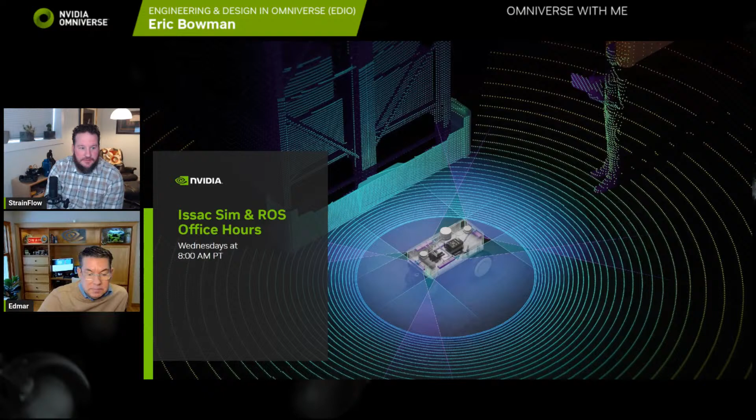I think I might start to help out in those office hours. I don't know if we heard back. Yeah, let me, actually that's a good point, it's a good reminder, let me ping them and see. It'd be great, I think your presence would be fantastic. It depends, we're not sure.

Very cool, so we got Papa Chuck in the chat. So are we hitting the steering today? Is that what's next up, or not yet? I've got a deadline now so you're going to see me get serious, getting it done during the week, just not during the live stream.

So I think I'll start off by catching everyone up on what I've done over the week and sharing a few lessons I learned. The core lesson I learned, one thing I was looking into, let's see, I need to pull up Onshape and share my screen. Just a second.

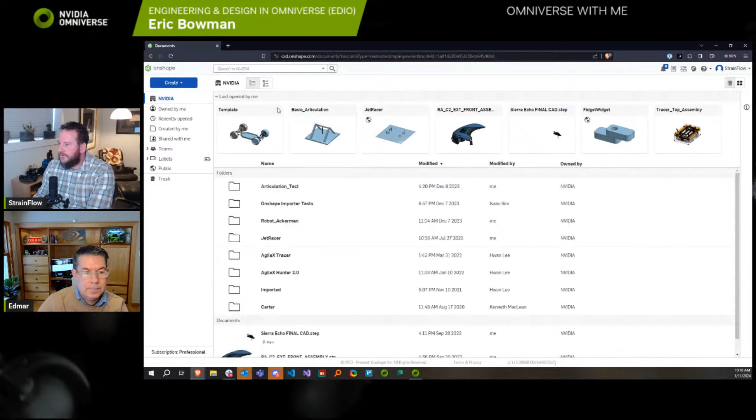Here it is. As it currently stands, this is a complete template.

And you know what I learned is that, okay, if you're doing a simulation in Omniverse of a robot, and if you are controlling your joints, your throttle, and your steering directly, then spherical joints are fine, and you could just model those spherical joints in OpenUSD.

But if you want to do something like reinforcement learning, which we all think is so cool, and we definitely, I'm headed as fast as I can in that direction, because it's so cool, exciting. And if you're not familiar with reinforcement learning, let me quickly explain that it's where you put a robot into some kind of physics modeled environment, and then you actually teach it with a reward system to behave in that environment. So it's just using the simulation to train the robot, with lots and lots of iterations.

And so a key component of reinforcement learning is you have to vectorize the robot. That means you have to be able to run a script that creates the robot, runs it through a simulation, and then dismantles the robot. And in order to vectorize a robot, you need to control all of your driven joints with these things called articulations within the Omniverse, within the Isaac Sim APIs. And it turns out that spherical joints are not supported with vectorization.

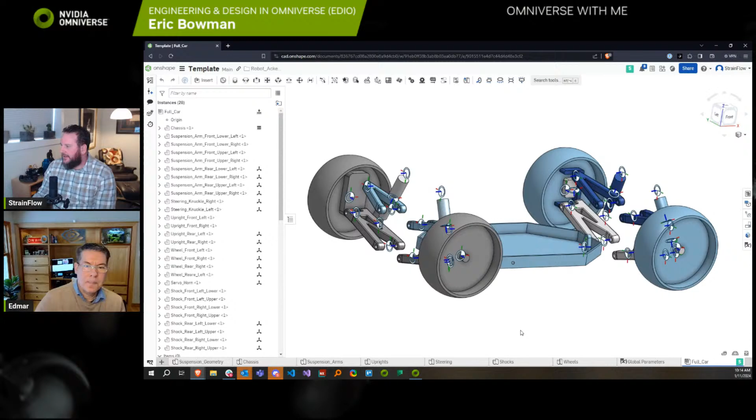Let's try parallel revolute joints, and let's just rework it so that this model only uses revolute joints. More accurately, so that it doesn't use any spherical joints. And I went back and did that. And if you look at the new template, you'll see that I've got all these lines for each joint, and those are all constrained to be perfectly parallel. So like all of our suspension members move parallel to each other.

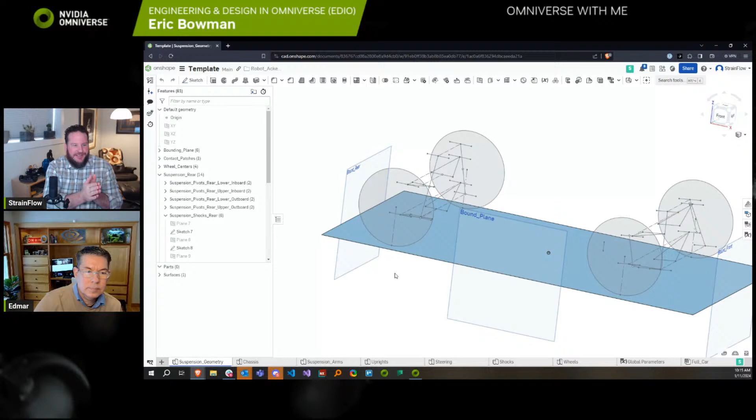And it works. It looks pretty good. So I'm not having problems with those revolute joints binding. And my hunch is that this physics engine can handle almost parallel joints. That's kind of an edge case, right? It handles those pretty well. Whereas multiple revolutes stacked exactly on top of each other, it has a hard time with those.

So, as far as remote control cars go, once I finished with it, I realized this is going to be a lot better template. It's not exactly the same, especially with the steering.

It's not exactly the same as the F1Tenth steering. It's simplified by quite a bit, but that's actually going to make it work better as a template, because it seems like every remote control car I see has a different steering mechanism.

And so if you actually model all of the steering parts, it was going to be a bit of a mess, and you'd have to remodel that part of the template for any remote control car, or for a lot of them. And originally I did that because I was kind of being particular, and I was saying, well, we want to have the exact right steering angles, and we want to have all those masses, the inertias of all those steering components.

And then I actually measured a steering component, and it weighed like 2 grams, whereas the car weighs like 5 kilograms. And so it's kind of like, okay, if we use significant figures, the mass of the steering linkages really doesn't matter at all.

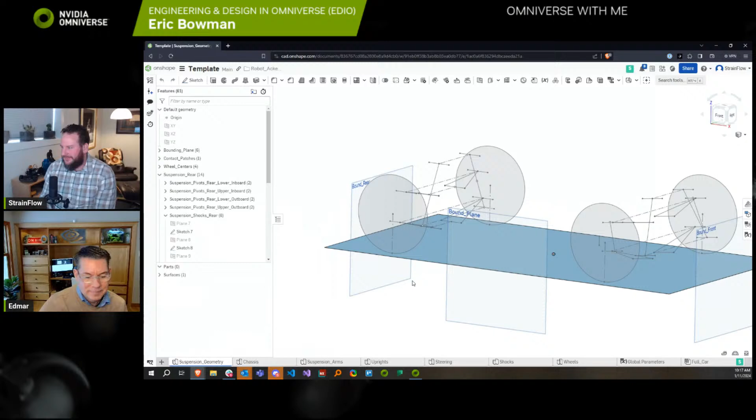So what I've done is I have the servo horn right here. Its position doesn't even matter anymore. And then I've got this steering axis that the wheels turn on, and I'm just going to model those as a gear joint. So basically, if the steering servo moves, the steering will move with it. It's not going to be completely accurate, but honestly, I think it's going to be better.

I think what you'd do for a more accurate template is, instead of modeling those as a simple gear joint, write a little extension that makes a gear joint where you can plot a curve that says, depending on the servo position, the left wheel is at this position. You could measure those curves from the mechanism, and not model the whole mechanism, but just include those steering angles directly.

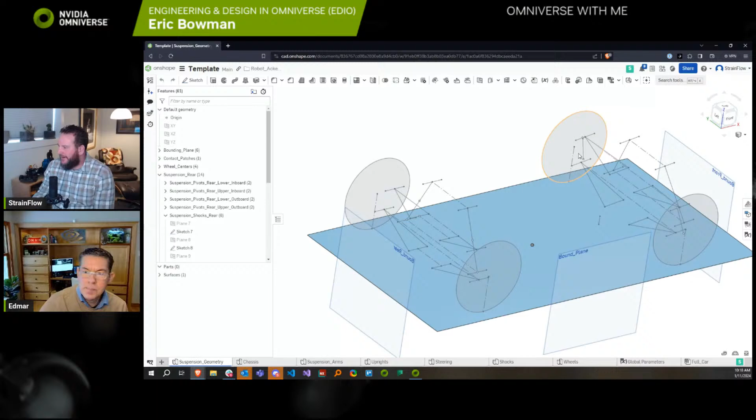So there you go. That was one finding, is we're not going to use spherical joints. I've simplified the steering significantly. Here you can see the chassis built off of that template. It's just a basic chassis. These are all visual models, not at all like the real car. They have some similarity, but we just need some mesh.

So I've gone through and weighed all the parts, and we just need a mesh so that we can apply the correct weights. One thing I found is that the whole car weighs like 5.5 kilograms, and the wheels weigh 120 grams each. Everything else is less than 30 grams. The parts that are 30 grams are the wheel uprights.

So the part that attaches to the wheel - you've got a few heavy parts, especially in that unsprung mass, like the wheels and uprights. Those weights are fairly important. But then the lower A-arm weighs like 10 grams.

I just don't think - I think we can simplify this template process. I would suggest people weigh the whole car, weigh your wheels, your uprights, but I wouldn't worry about the A-arms, and I wouldn't worry about the shocks. They're all really light, and you could just estimate 10 grams each for those, or just some small mass.

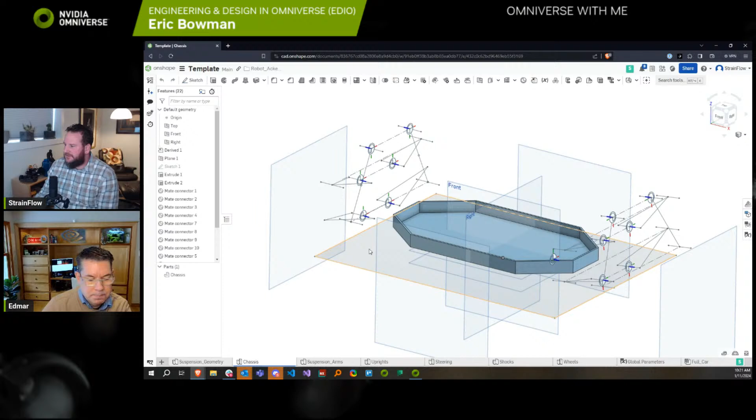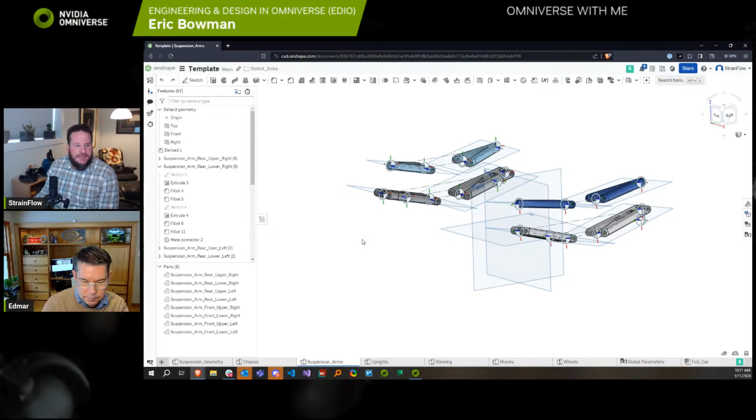So then I built the chassis off of that template, and here are the A-arms built off of that same template. All I do here in Onshape is whenever I need to create some new parts, I create a new part studio, and then I add a derived part. Where is derived part? Right here. You can go back to that suspension geometry template and bring in whatever hard points I need, and then build off of those hard points and planes.

Here's where you get some rougher looking - these are just some basic representative uprights. You'll note, it's interesting, the Traxxas Slash - cars I've done before, the upright actually steers. So you've got the upright connected to the suspension with spherical joints, and then that whole thing turns. But on the Traxxas Slash, there's an upright that attaches to the suspension, and then it has a separate steering axis and another part that actually does the steering. I hadn't thought of this, but I think you can model any of the car suspensions that way.

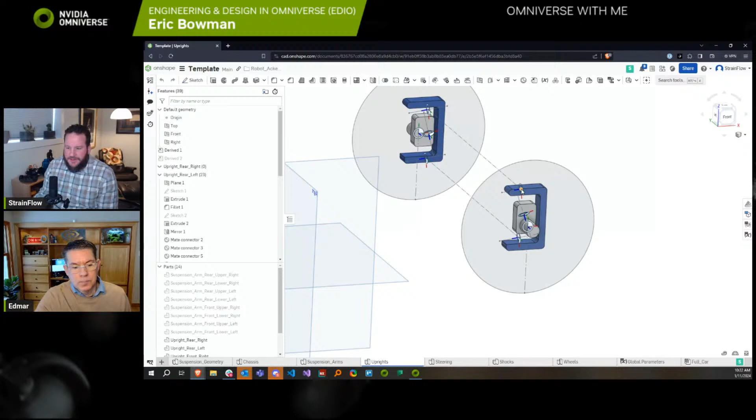And if you have a fully steering upright, you just put the end point of this steering axis on the center of the upper A-arm's revolute and the bottom one at the other A-arm's revolute joint. You've broken those two - instead of having two spherical joints, you have 3 revolute joints, and it models the same degrees of freedom, and will simulate better in Omniverse. This will work for either style.

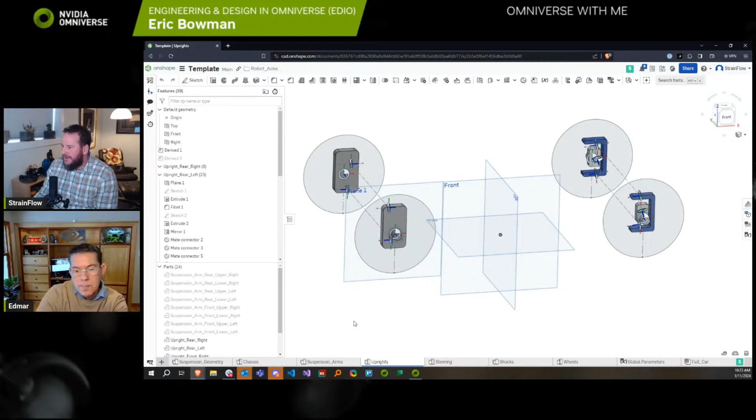That was a really nice thing that came out of this journey - I found a way of modeling it that can model the other type of upright, but only using revolute joints. It's great. The only thing we don't get: high performance cars have A-arms intentionally not parallel to introduce anti-dive and anti-squat dynamic characteristics, and we're not going to model that with this. I don't know how yet, but remote control cars don't typically get that sophisticated.

Here's a little steering horn, some basic shocks, some basic wheels, and here's the assembled car. You did all this since the last live stream? Not all of it, but I redid - I had the arms already, but I had to redo the template, all the steering, and redo a lot of the template to fix the joints.

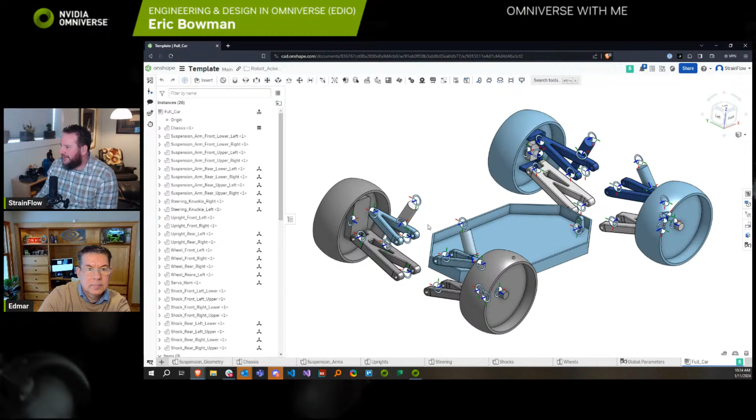So there we go, here's the template. It's revolute joints, and then these shocks are prismatic linear joints naturally, but not a single spherical joint in this template.

Before we move on, let me review questions - happy to answer anything about this CAD work. It's definitely not realistic. This is as far as CAD goes, I'd call it a simulation schematic. It gives you an idea of what the parts are - they have meshes we can apply weights to, relatively similar centers of gravity to the real parts, but representative of the parts rather than accurate.

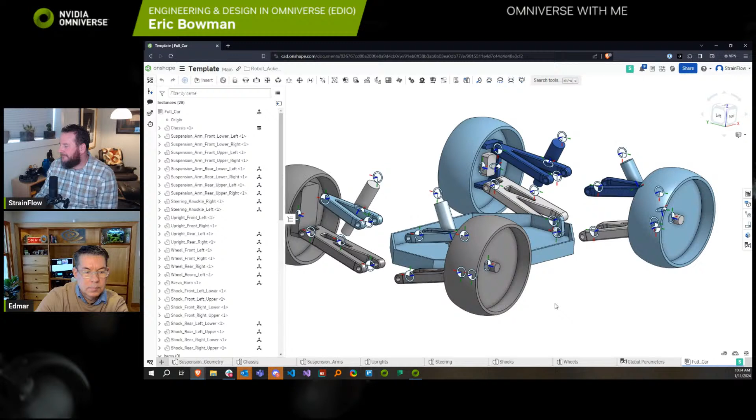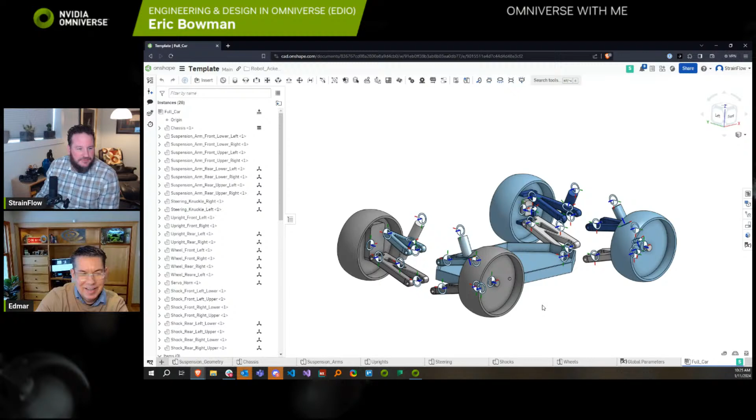I don't see any questions about the CAD, so let's step into Omniverse. This CAD is done, and we're going to be in Omniverse until we can drive this thing with our Xbox controller, and it looks kind of convincing, like a real remote control car driving around.

So I'm going to close this, and I'm going to open Isaac Sim. Let's see - launching Isaac Sim on my other screen. I'll bring it on once it's launched.

That's not a bad screen to look at while we're waiting. Thanks, love that picture, that's crazy. Two of my favorites are just any photo of a space shuttle launching off, and that first flight photo with the Wright brothers. I just love those photos.

You're the right person for this live stream. Oh, did someone say that? That's kind - no, that's me. Oh, that's you, okay, well thank you, that's kind.

It's launching, almost there. There we go.

So I've imported into the... is it going? Oh, I'm not on VPN, folks. Just a minute.

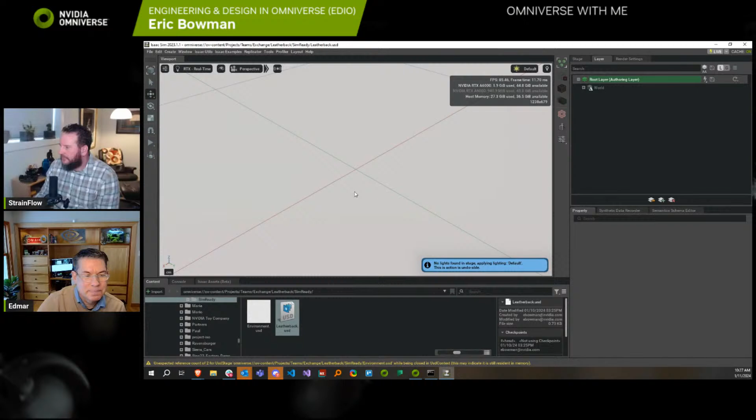All right, it looks like we haven't done the import yet. So let's just go through this - how I want to do this. I'm going to delete you, we're going to start from scratch here because there's really not much done here.

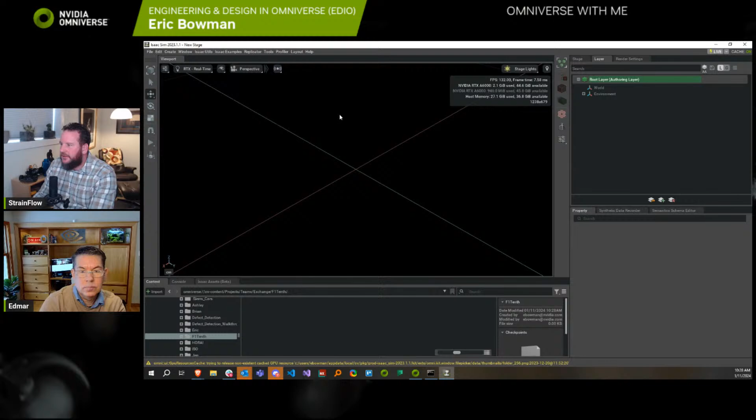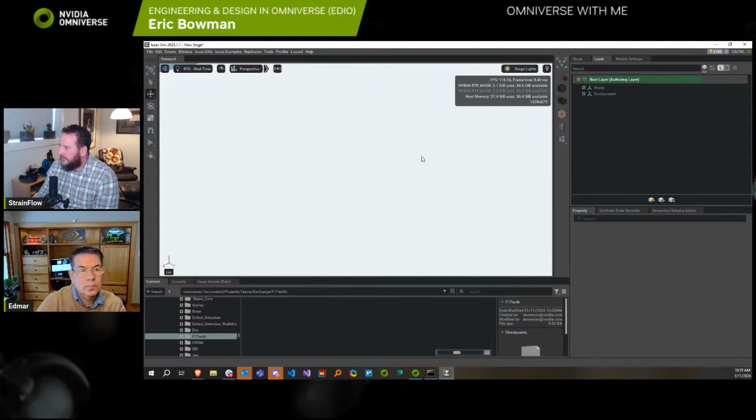All right, so we've got a new scene here. File, import from Onshape. Here's the template, let's import this CAD. Great, there it is. Now what I want to do is go ahead and save this. Actually, let's go ahead and create a ground plane.

And if we run it, it's got some problems, right? But we see that a couple of our joints are in there. We'll walk through this here after I just save a few things. So first we'll save the scene.

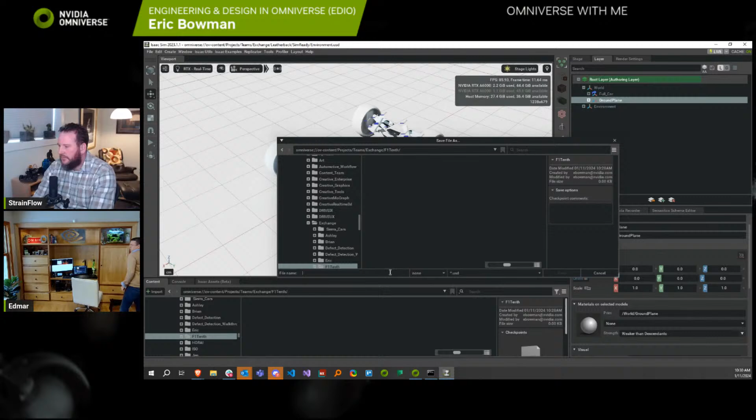I'm going to call this environment. Where is it? Environment - there we go. Well, it froze because I was authenticating and VPNing and doing all the secure stuff, that's why I froze. So, all right.

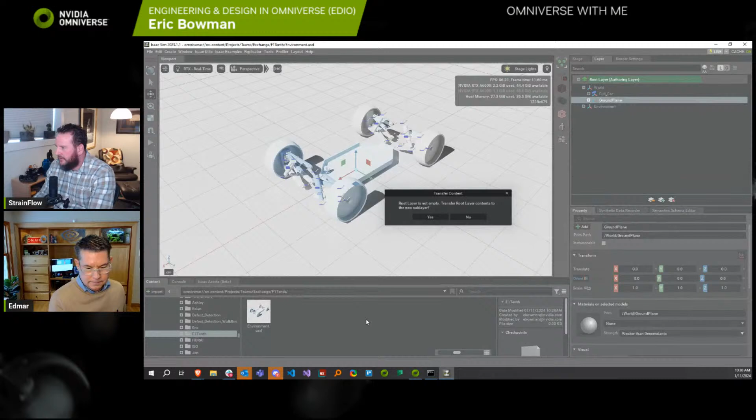So I've created this environment. Now what I want to do is create a new sublayer. I've created... what happened there? Create a sublayer. Oh shoot.

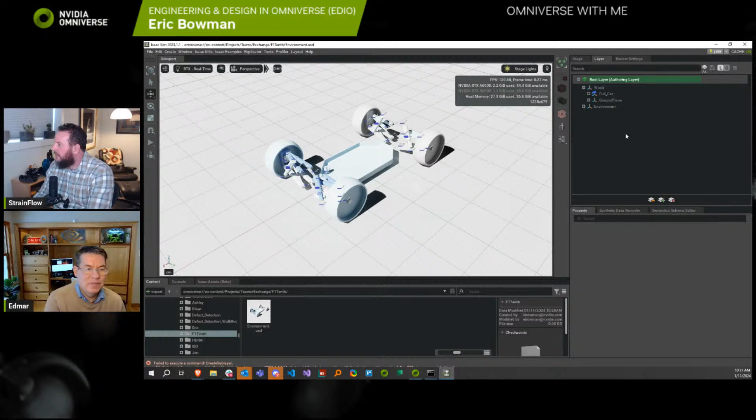F1Tenth, Data Juggler's asking about Jen. Jen is on vacation right now. Sure, she'll fill us in on all the details as soon as she gets back, but she'll be back soon.

Just a second, I'm getting an error here.

I'm not sure what's going on here. Got that saved. I'm going to relaunch Isaac Sim real quick.

Is it hard not having Jen here to have her engineering input as you're working through these things? Oh look, there's my other favorite photo. Beautiful, yeah, she's great, right? So she's great because she doesn't have an engineering design background, so she asks great questions. But she has a very analytical mind, so she asks really great questions. And then whenever we're doing any kind of Python work, she's invaluable. She's just a wealth of knowledge when it comes to Python. So yeah, definitely miss having Jen. We all miss her, she'll be back soon. I'm sure she'll bring back some nice coffee from wherever she's traveling to.

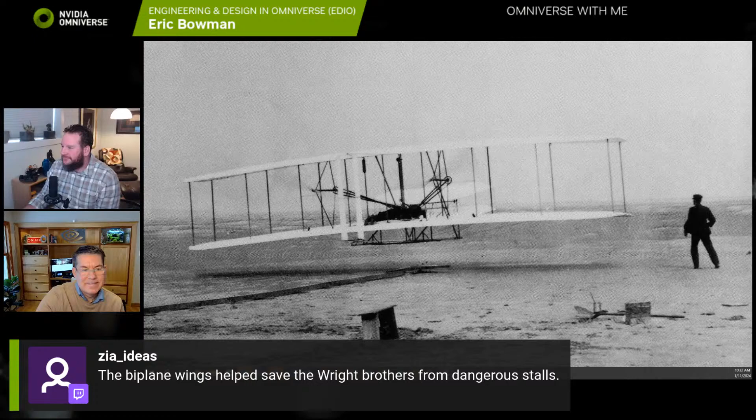A nice little trivia from Zia here. The biplane wings helped save the Wright brothers from dangerous stalls. Did you know that they didn't have any kind of flaps yet, so they actually twisted the wings to steer the plane? Brave people. Another interesting one is the plane was aerodynamically unstable, so if you just didn't do anything, it would totally crash. They were really hard to fly for the first few years, until they figured out that if you put the center of mass and arrange that with the center of pressure of the wings, it would become stable, and you'd have stable flight.

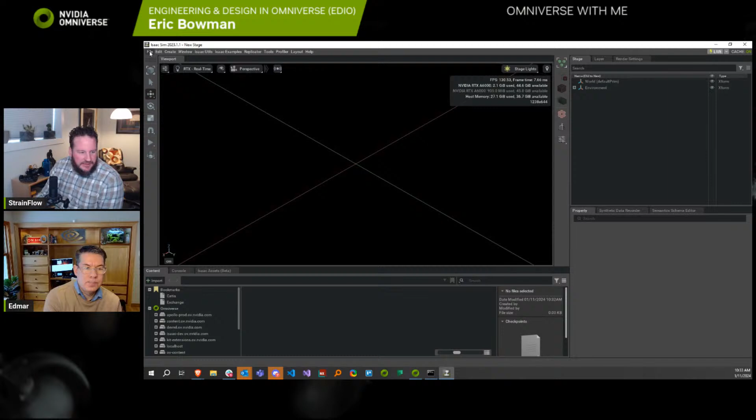Let's try this again. What I'm trying to do is create a sublayer and move all of the car stuff to the sublayer. What that'll let me do is, if I've got the environment in the parent layer, and all of the car stuff in a child layer, we'll be able to put this car into different environments to drive it around.

Which is definitely what we want. Then we can just rig it in this flat plane environment. I've got some other NVIDIAns working with me, one of them is making some tracks, so we'll be able to just put it into tracks. But it wasn't letting me create a sublayer for some reason, so let's try again.

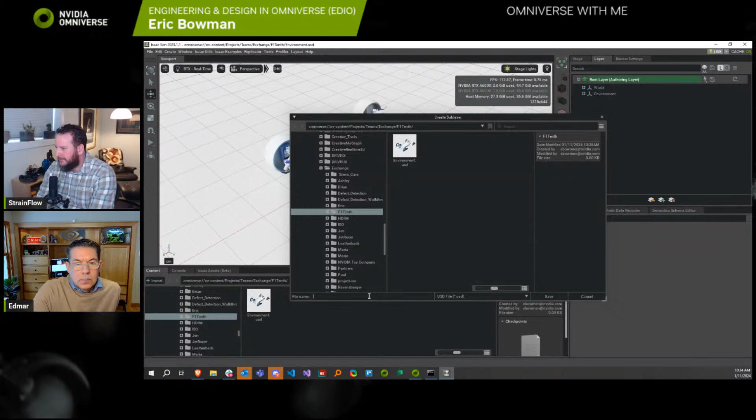It's erroring. Let me just try a different name or something. Was there an error that popped up? No, in the console there was. There we go. You know what, maybe it didn't like that it had the same name as its containing folder, F1Tenth. I'm not sure, but I just put car.usd in, and that works for me.

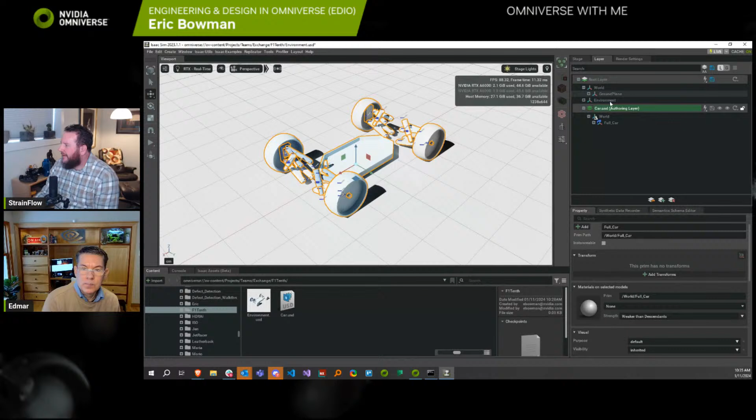Let's set that as the authoring layer. What we can do now is take the car and drag it in there. So now this is saying the delta on the world prim, and it's going to add the car and everything it contains to the world prim. Let's save that. So now our environment's in this parent layer, and the full car is in the child layer. Let's start to fix some of these issues we saw.

Let's run it again. Okay, so we get all these errors. These are common errors when we're working with articulations. So that import not only brought in the geometry, it made all these joints for us. All the joints that we had in the CAD system, it made those for us. So that's nice. Oh dear.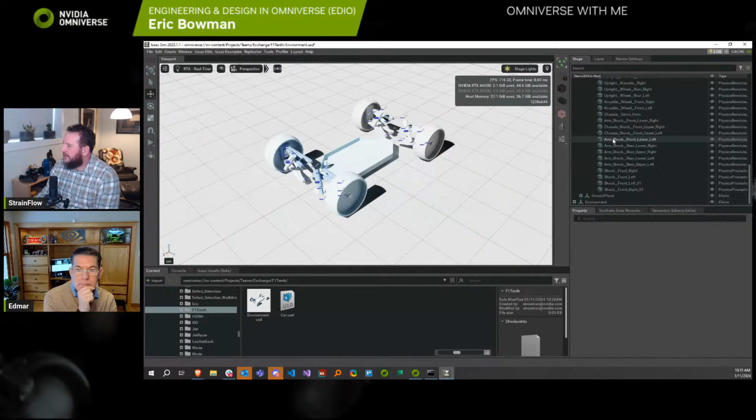I just remembered, I misnamed these joints. Okay, let's see here. So where's the front? This is the front on this side, so those ones are correct. This is the rear left, this is the rear right. Okay, let's rename those. Oh, I can't—there's a problem with renaming joints that I was having trouble with. So we'll just leave it for now and remember that those are named wrong. It's not the end of the world.

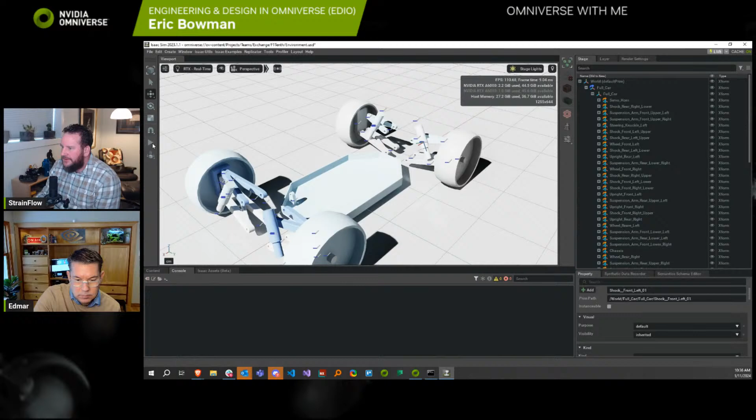Let's look at our console. Let's clear it, only do warnings, and then run the simulation, and then stop it. Let's read what these warnings are saying. It talks about these joints being part of an articulation.

But it's saying it's not supported, right? That's actually not the problem. Let's go up higher. Here we go: this appears to be a part of a closed articulation, which is not supported. Please exclude one of the joints. And it's got all these errors about that on these joints.

When it comes to simulating joints, there are generally two different solvers. You've got your video game solver, which can have a lot of joints, but it's not the most accurate, so joints can move a little bit and be out of position. If you're doing engineering simulations, you typically want to use what's called a reduced coordinate solver, or an articulation solver.

That's what we've got here. If you look at the full car, the Onshape importer is smart enough to know that we're doing robots, and so it sets an articulation root right here. It adds an articulation root to that parent prim, and what it says is that all of these children are part of an articulation.

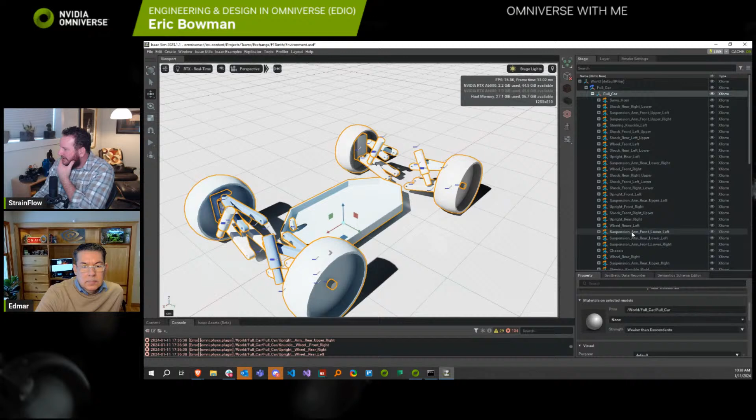Now I think what we're going to want to do is move that articulation root from here to the chassis, because we want the chassis to explicitly be the center of our articulation as far as any loops and things go. So we just add an articulation root right there.

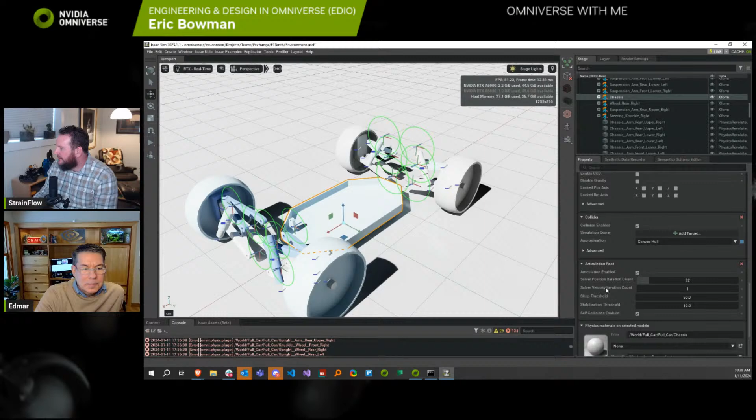Let's see, where's that articulation root? Physics, rigid body, collider. Here it is. Articulation root. We should, if you run it again, get the same effect, with lots of problems. Okay, it made it even worse, but sometimes things get worse.

I think the next thing we're going to do, and there, let's save, as Zia suggested. We can just save the car layer, which is really all I've been changing so far.

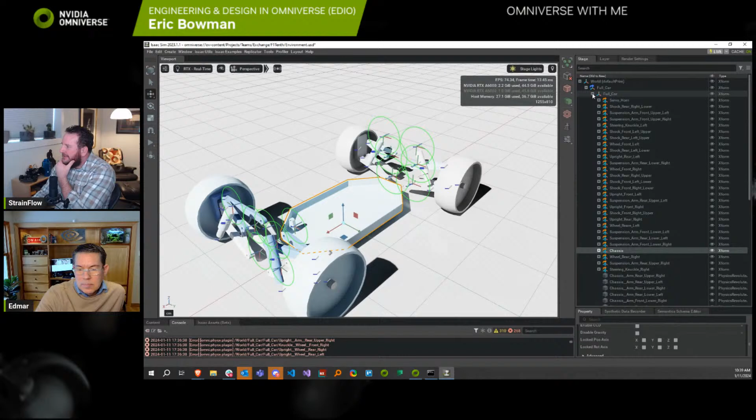The next thing I want to do is add a collision group.

A collision group just lets us make groups of colliders and say which ones can and don't collide with each other. In this case, when you say filtered groups, it says I don't want any prims in this group to collide with any of the filtered groups. And so if we select itself, that's saying I don't want any of the prims in this group to collide with each other.

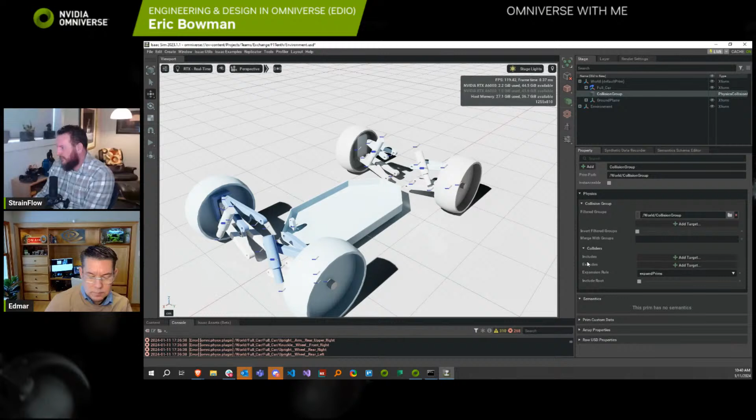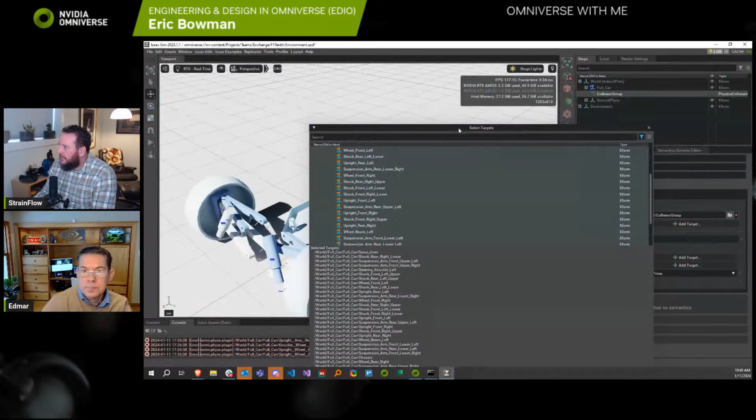So then we add any colliders to this group we want. I can filter by colliders now, and I just want to select everything in the car. So select... can I shift select? I believe that worked. Yeah, so we want to select all of the car parts, but not the collision ground plane. Oh, I didn't want to snap that.

Okay, and select. So now these objects will not collide with each other. Okay, they just passed, that's a little more stable. But we're still getting these errors.

What I was getting at is, if you have an articulation and you're using the articulation solver, you can't have any loops. They have to be kind of just end-to-end connected. The way you can get around that is you have to pick some joint and specify that joint is not part of the articulation, and that breaks up the loop.

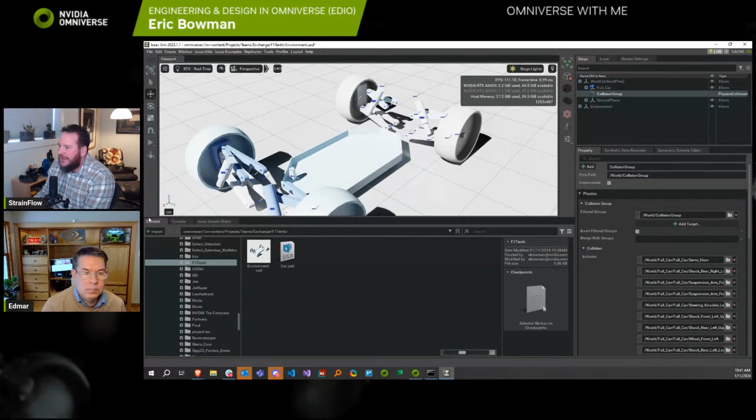So let's just do that. If you look, these upper A-arm joints, the solver just kind of runs to those last, or to some joint last. Here, these ones you can see, they just fell to the ground. That onboard joint just is ignored. And there's some joints on these shocks that's happening too. That's what's going on there.

So let's fix it. All we do is pick the joints that we wanted to ignore. I like these upper A-arm joints, for the principle of no good reason. And you just select exclude from articulation. And we'll do this with this rear upper left, exclude from articulation.

By the way, if you notice, I've named these as the two things that are connected, separated by two underscores. So if there's single underscores, those are spaces. If there's double underscores, that represents more of like a hyphen. So the chassis to the arm, to the rear upper left arm, that's what that means.

So we want the chassis to the front. Here we go, chassis to the front upper arms, those two. So let's exclude those from the articulation, and let's exclude the front upper left arm from the articulation.

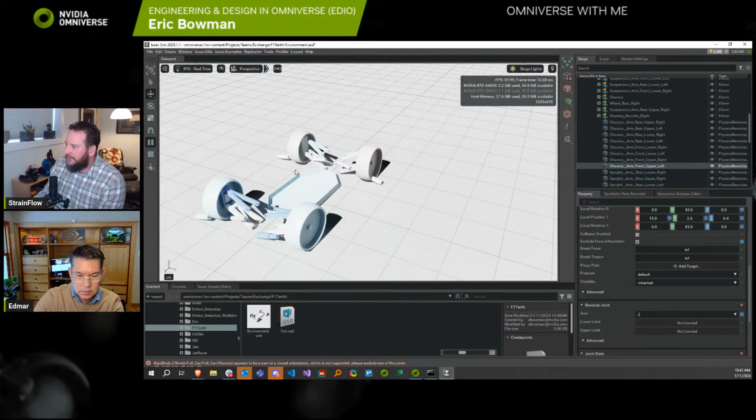Now if we run it, it's doing a lot better. These shocks are still messed up because they have their own loop, so we're going to have to get rid of that loop. But notice that the arms are all behaving like they should.

So let's see here, we want to go to the chassis to the shock. Chassis to the shock, front upper right. Chassis to the shock, front upper left. Those are our front shocks. Let's exclude those upper joints from the articulation. And we want the chassis to the shock.

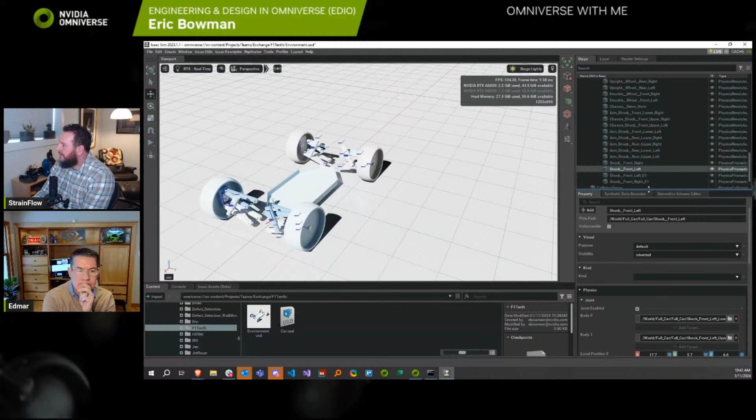There should be two more of those. Those are the actual shock joints. Arm shock, arm shock. I'm not seeing it, but it's got to be in there. There's that one. No, not that one.

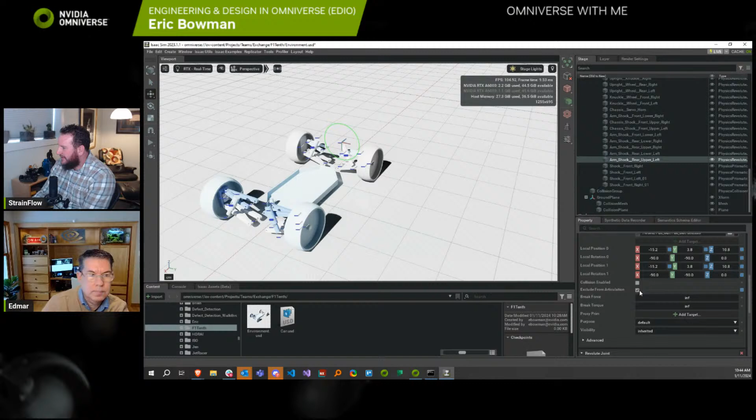Arm. Oh, I misnamed these two. Looks like I got some naming convention to fix, huh? Exclude. That's one of the hardest things for me, going back and naming things well when I'm trying to move fast. Great, so let's run it now.

And you can see that nothing is, they're looking good. There's a good chance these are spinning in place. Oh no, they're not, those are revolutes now, not sphericals. But that guy is just spinning, right? It's funny, it's slowing down.

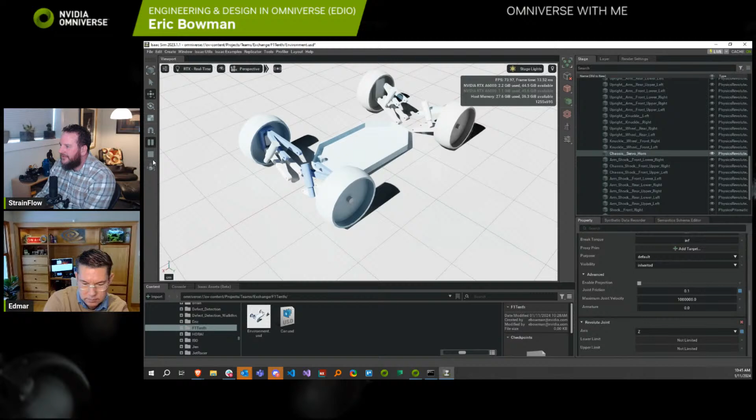Let's go to that chassis servo horn joint, and let's see if it works for us this time. A little bit of joint friction. There we go, well, almost. Let's add a little bit more. There we go, that's a little better.

See how it's not spinning forever? But really what we should do is, let's see, where are we in it. Let's go ahead and add a driver to it. So if we go into that chassis servo horn joint, we can add a physics angular drive.

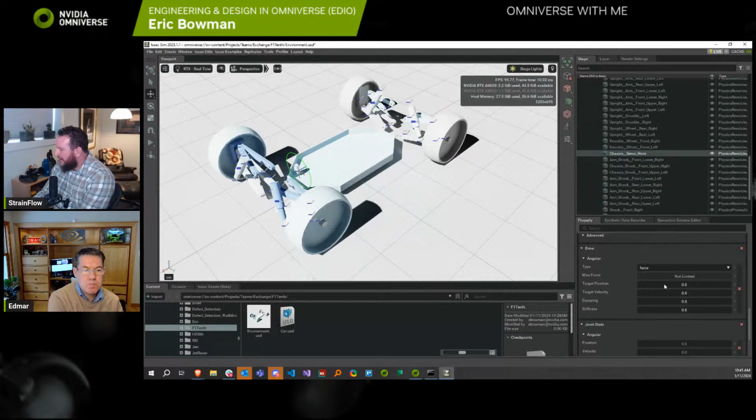And here it is, and we want the target position to be 0. It's still not going to do anything. See how it just behaves the same still? I'll zoom right in on it. And that's because, man, I always forget.

But if you have the angular, it does move. Oh, look at that, it's tracking those positions and velocities for us. That's kind of cool right here. You've got to set the damping and the stiffness. And if it's an angular drive, I believe it's low damping and high stiffness. There you go.

Nope. There we go. So now I can say what angle. There's at 10 degrees now. See how responsive it is. No, I can't just drag and have it move real time, but...

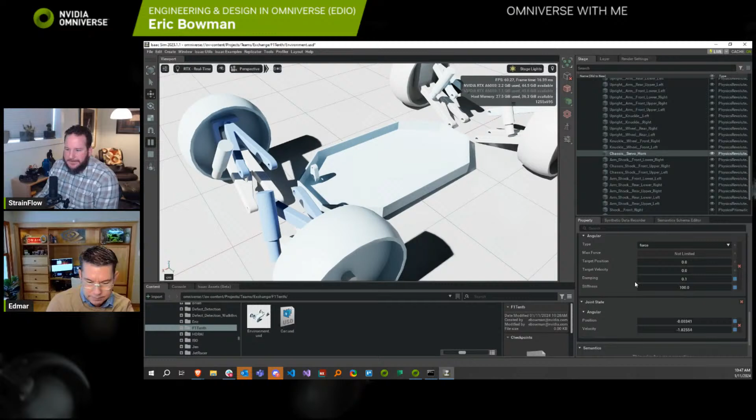So that's that, straight down. Yeah, so now I can move this thing, right? That's kind of cool. So now we've got our steering servo, it has an angular driver. So that means we're going to be able to use a script or code to find this angular drive and move that servo. And the same thing, if we pick all 4 wheels, those should be...

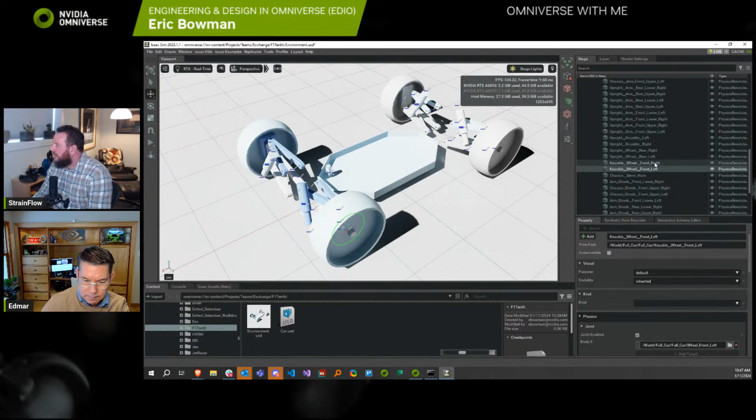Knuckle wheel, here's 1, 2 of those. Oh, I call those upright. Yes, that's right. In the rear, they're uprights to the wheels. In the front, it's knuckles to wheels.

Let's add an angular drive to those. For those, let's do a target velocity. 10, we're just making up a number. And then we'll do a high damping and low stiffness.

Oh, it just creeped a little bit. Let's make that target velocity higher. There we go. Nice, yeah, let's make it 500. Make it move.

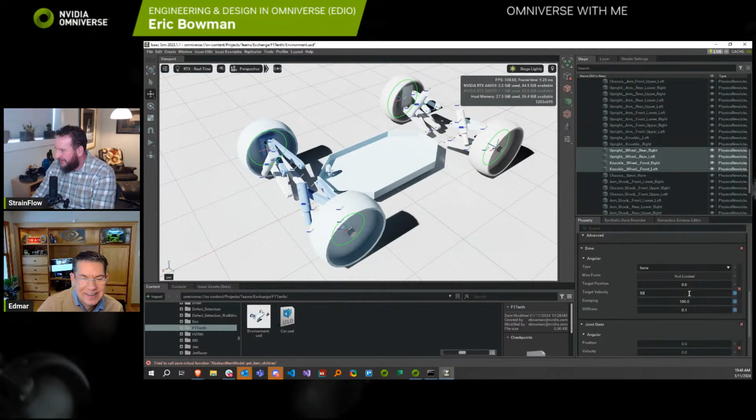You got too high. It's actually not, how's the bumpiness? Off into the sunset, yes, there we go. We needed an environment with a sunset. Cool, so great, man, we look at this.

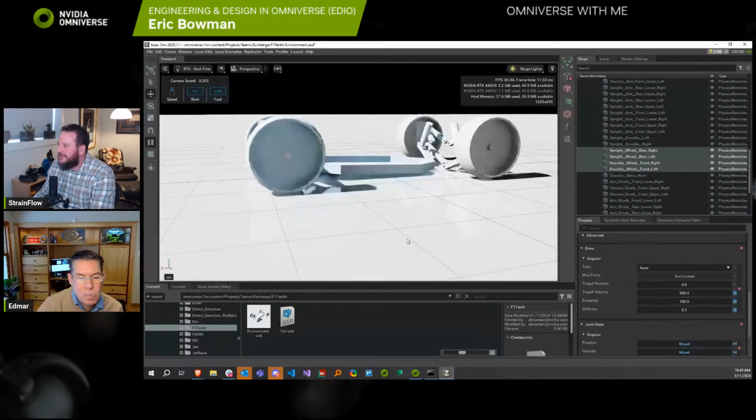One thing is, you notice it's dragging on the ground, because there are no springs yet. And the other thing is, let's make it steer a little.

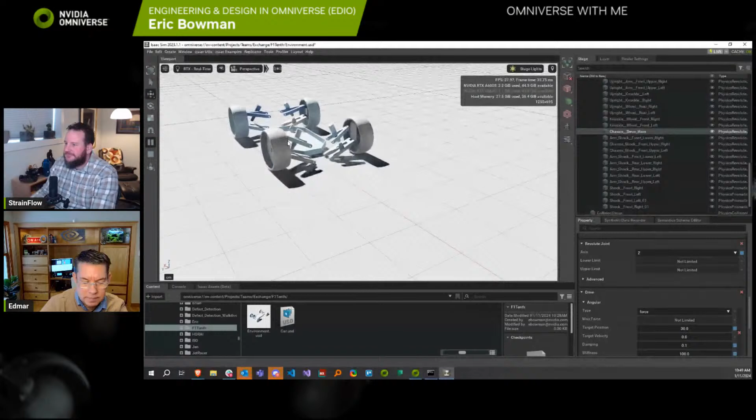Let's make it steer. Right now, in theory, what we want to do is grab this servo, and if we make it to like 10 degrees, let's make it like 30 degrees even. That it should be turning, right? For that, and I've never done this before, I hope it goes smoothly.

It probably won't. Let's create a gear ratio here. So we're going to create a physics joint. Oh, you got to select the stuff first. We want a gear joint.

So let's choose the upright knuckle right, that's my revolute joint on that tire, on that wheel, and let's choose the servo horn. And now I think we can go to create physics gear joint. No, I can't. All right.

Create physics joint. I can't create any joints. Why can't I create any joints? I don't know how to create a gear joint.

Let's just try this. Let's just create 2 prims. Select 2 prims, create physics joint, gear joint. Let's look at its properties now.

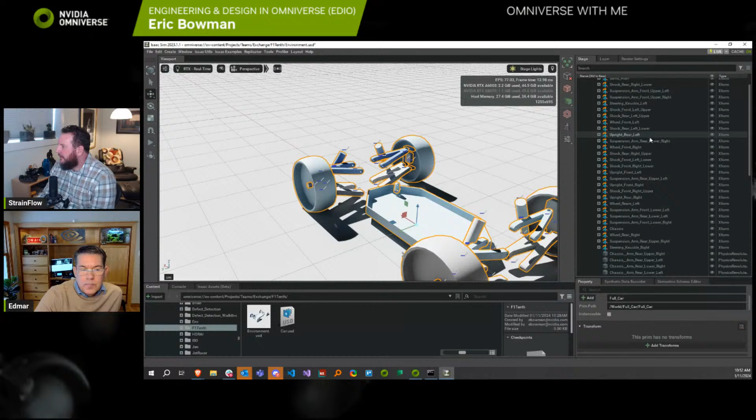So I think what I'm going to do is just create one. Create physics joint, well let me do that. Let's make it here in the car, I guess. You know, it probably has to do with determining the articulation. So let's just choose the front right wheel, I guess, and create a physics joint.

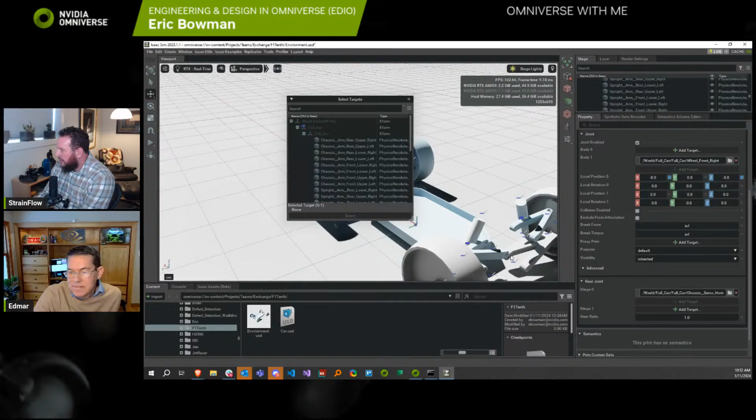So now we're just kind of logically saying this is attached to that front right wheel. I don't know if this is going to work, fingers crossed. Here's the servo horn, and we want the upright knuckle. Right, sure, why not? Gear ratio is 1.

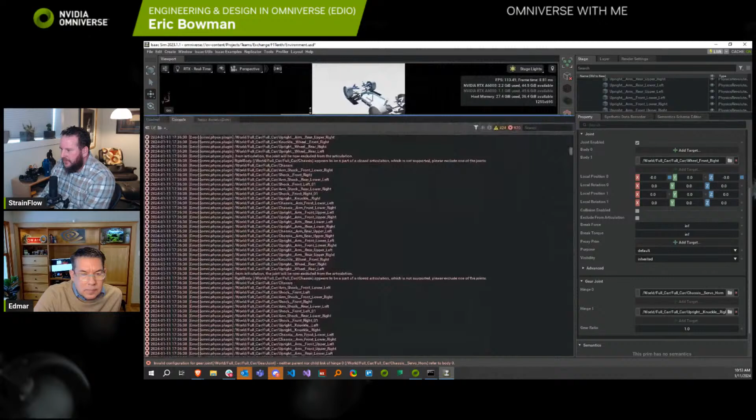Okay, we had an error, but it looked like a pretty good error message: articulation cannot contain a gear joint. Please exclude it from articulation.

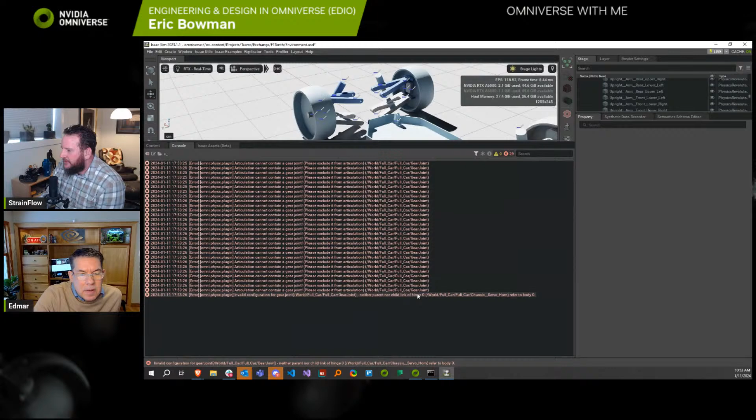Okay, that's 1. Neither parent nor child of hinge 0 refer to body 0. Okay, so I think the bodies have to be related to those spherical joints, it looks like. So first, let's take care of this one.

Exclude this gear joint from the articulation. And second, let's edit it. The wheel was not part of that either.

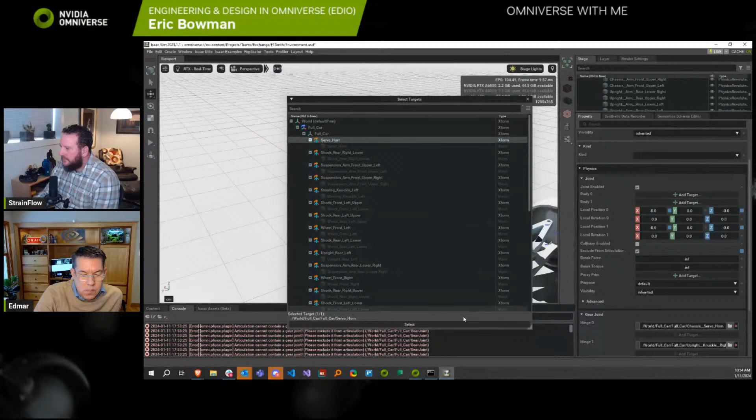So for body 0, let's add the servo horn. Is that right? Yeah. If I can find it. There it is, select. And for body 1, let's do the knuckle - steering knuckle left, I want steering knuckle right. Let's see if that works.

Look at that, is it turning? I think I saw it turn, but let's really crank it up, that angle. Make it like 30, what is it right now? Oh, it is 30 degrees.

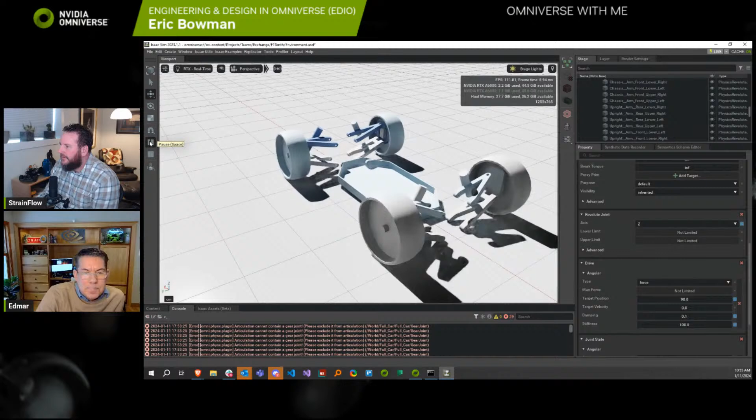Make it 90 degrees and go in a circle. No, it's just going to turn it really hard, but it didn't seem to turn it. Let's try it again.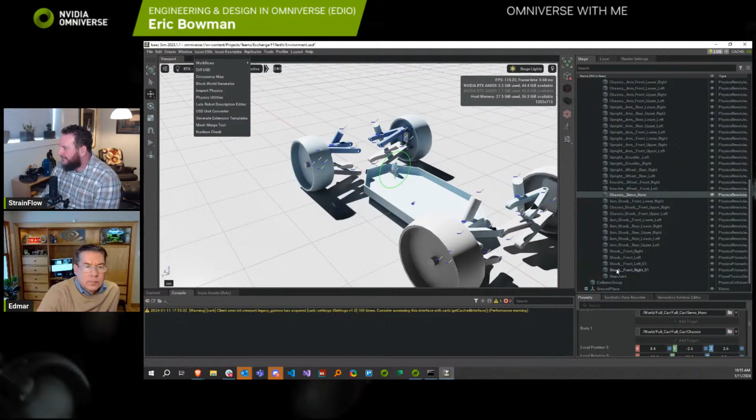No errors. Well, looks like I've got some research to do on gear joints, but that's what it is. If we can't get it to work that way, then we'll just write a script or something. Or what I could do is just put a driver on both wheels. I think I'll do that, because this doesn't work with articulation anyway.

And what we can do here is go to the upright knuckle right and the upright knuckle left, and add it as a physics angular drive. Make a target position of like 15 degrees, and we'll say 100.

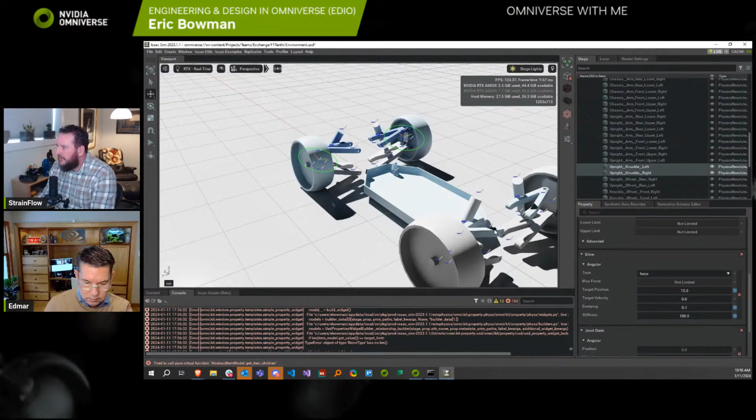There you go, yeah, that's going to be fine. We'll just do that. We'll control both wheels and kind of have them be the same angle. Now just ditch that.

I guess we could, just for visualization if we want, make that servo horn match, right? Yeah, I think that's better. So now it's steering.

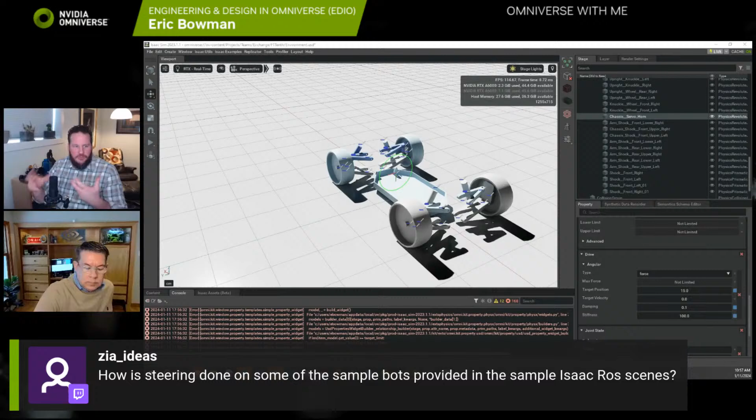Great question from Zia: how is steering done on some of the sample bots? I think most of them are differential robots, so they don't have a steering linkage. They just have one wheel go, or only one wheel go, or the wheels go opposite directions. So that's a little bit different style of steering.

So all we've got to do now is add spring force and damping to these shocks. I'll show you real quick where that is. If you go to the shock joints, like right here, go to advanced, excuse me, here in the prismatic joint.

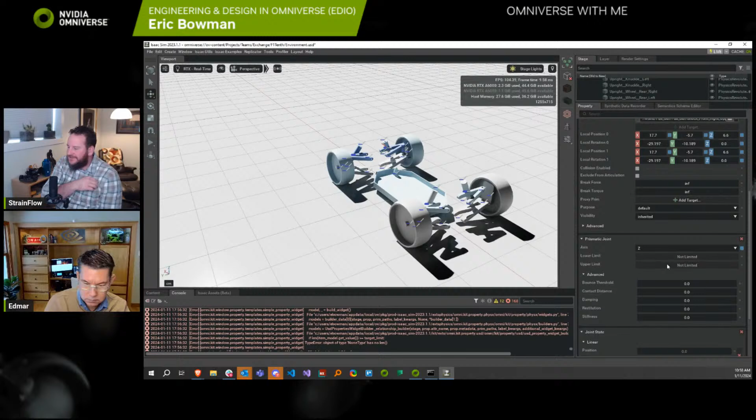First, you set upper and lower limits. Then if the shock ever exceeds those limits, it'll apply whatever stiffness and damping you've set, and these properties. So that's how we'll take these prismatic joints for these shocks, and we'll add springs and dampers to those.

And at that point, we should have a drivable car. Exciting. And I already have an extension that I can use to control stuff with a gamepad, and I'll just reconnect that to this prim structure, and we should be able to drive this around.

Fun, you got a lot done today. Yeah, a lot of errors removed. So hope you all enjoyed, it was more of a just-watch-me-go session than usual, but I hope you enjoyed it. Hopefully next week I can show off a car that we can drive around with a gamepad.